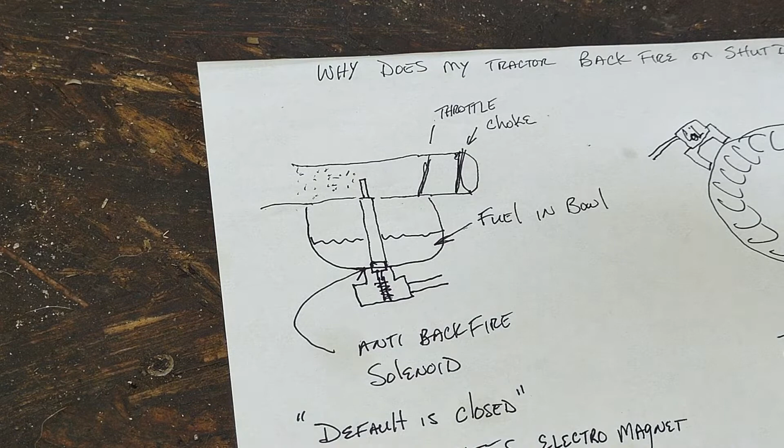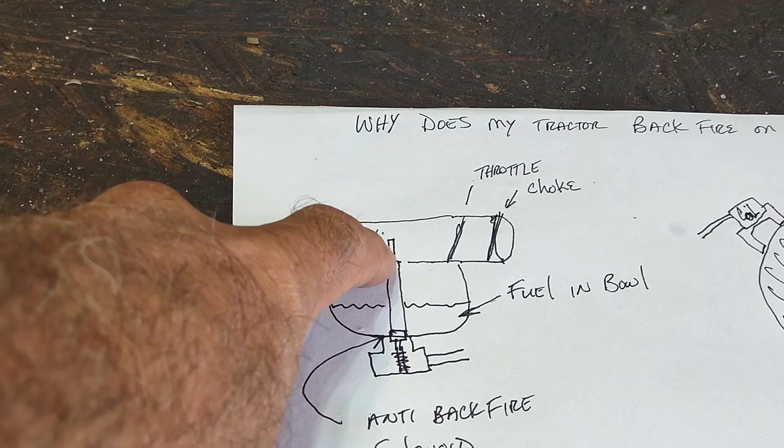So the question is, why does my tractor backfire when I go to shut it down? There's a ton of videos out there that tell you, well, this is what you need to replace - it's called an anti-backfire solenoid. What it does is, its job is to stop or allow the fuel flow from making its way into the engine via the venturi and that emulsion tube.

So what happens is, a lawn tractor is either going to have a big bore single cylinder, or maybe a twin cylinder. And because the workload is not attached directly to the end of the journal, it generally goes down to a pulley, and then it drives a series of pulleys and stuff.

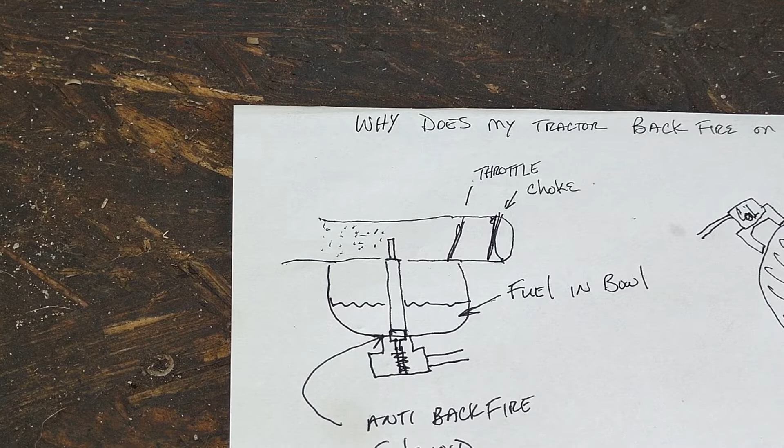A regular push mower has got the blade underneath, and as that's spinning around, that adds weight - that's like having a bigger flywheel. And so on a riding tractor, those flywheels are really super heavy. You'll see where this comes into play.

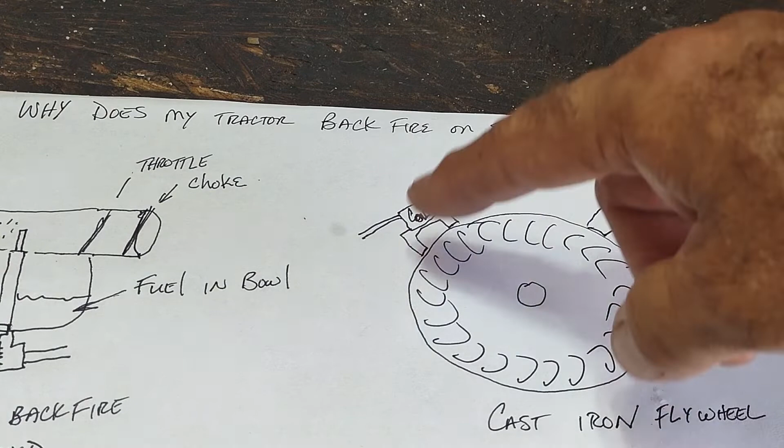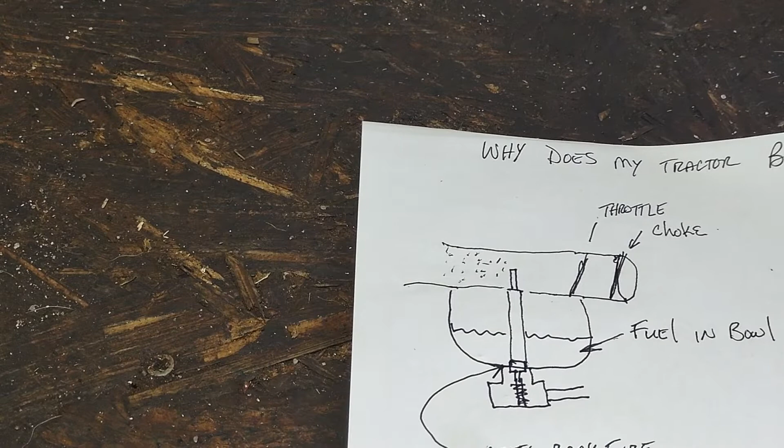So let's just say it's a twin cylinder - ignition coil here, and then this cast iron flywheel that spins around. What happens is, when you go and shut off the ignition switch, it kills the power over to this solenoid that's on the bottom of the bowl of the carburetor.

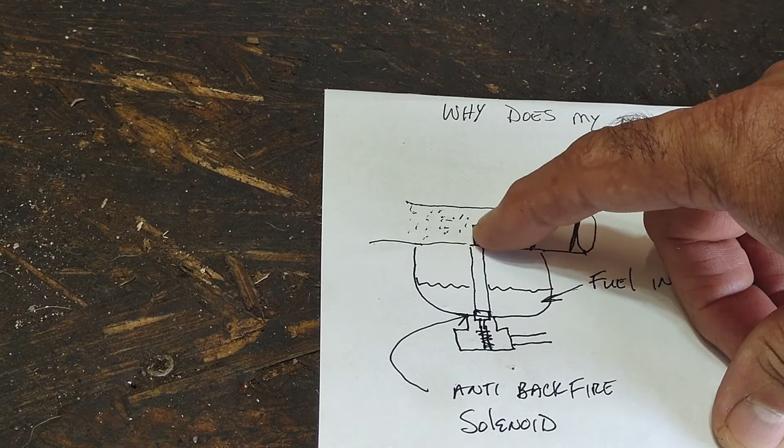And the default is if it has no power, this plunger, which is on a spring, will go up and it will close, so that the fuel cannot go up through the tube in there and then into the engine. Well, I hear a lot of guys say, oh, you don't even really need that.

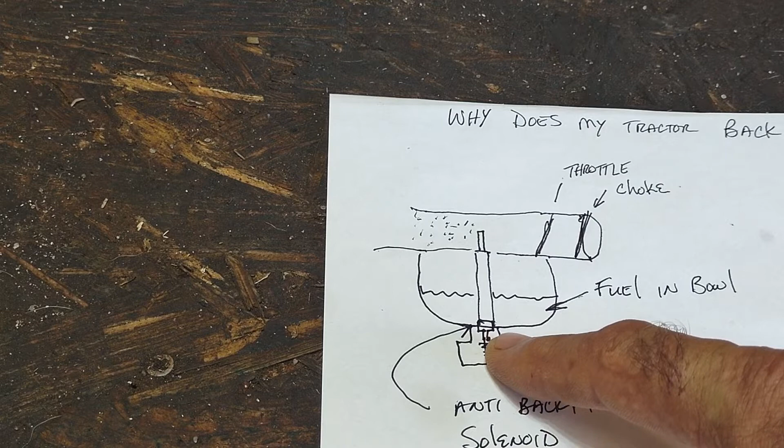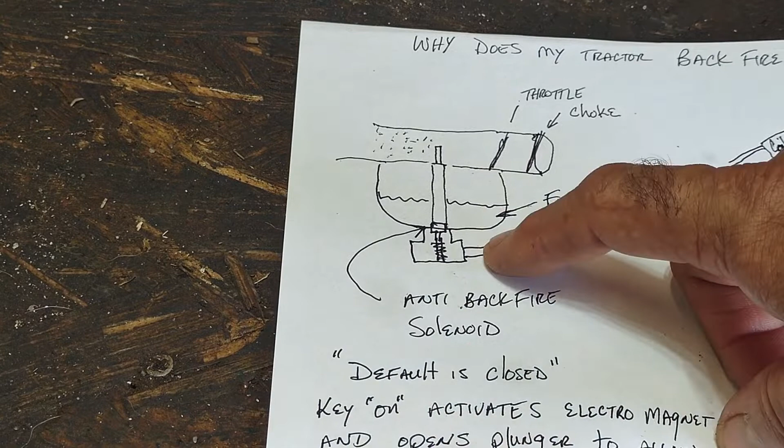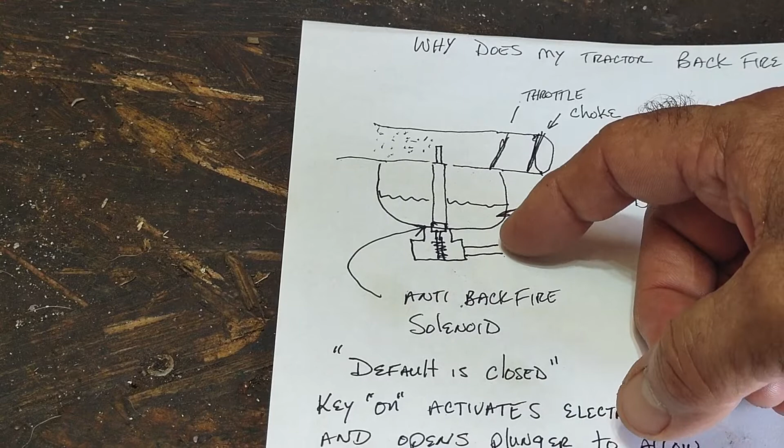Well, you kind of do, because this is what happens. Bear with me. So down here it tells you, because I wrote it, the default on that solenoid, with no power, is closed. The key on activates the electromagnet and opens the plunger to allow the gas in. So if you put a voltage on there and it's not running, you'll hear it click, because it's going to pull that plunger down and allow the gas to go up through.

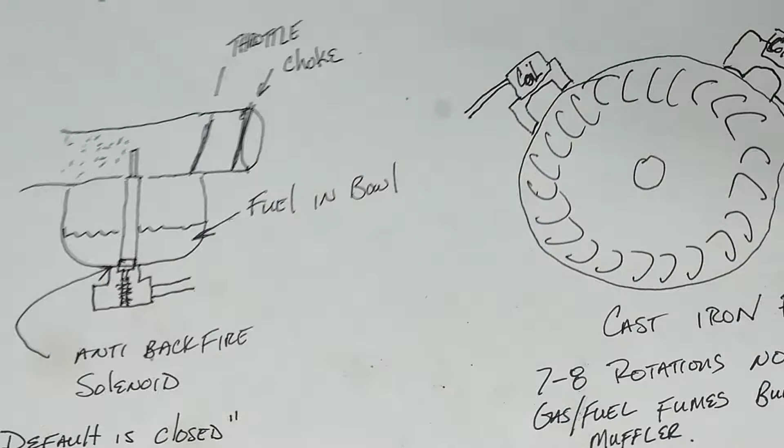And the reason why they put that on there is exactly this, is to stop the backfire. Well, what is a backfire?

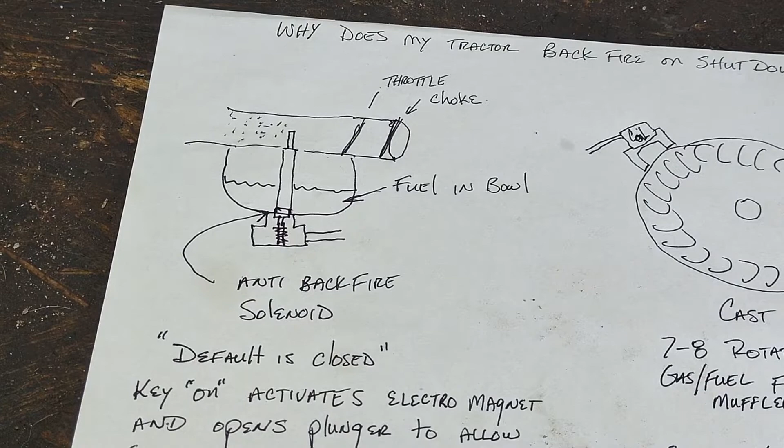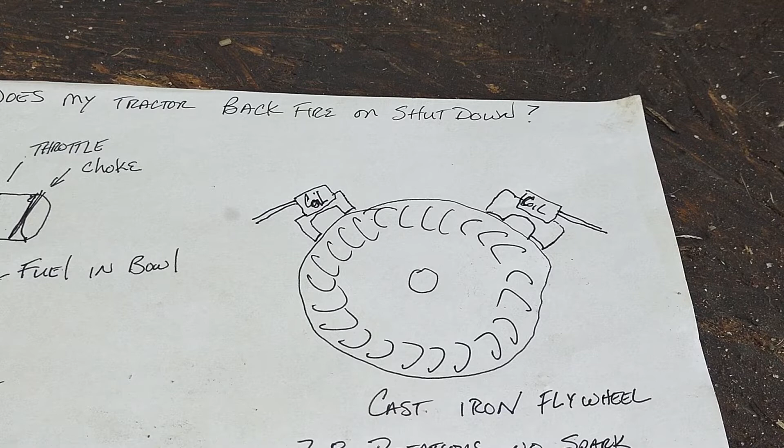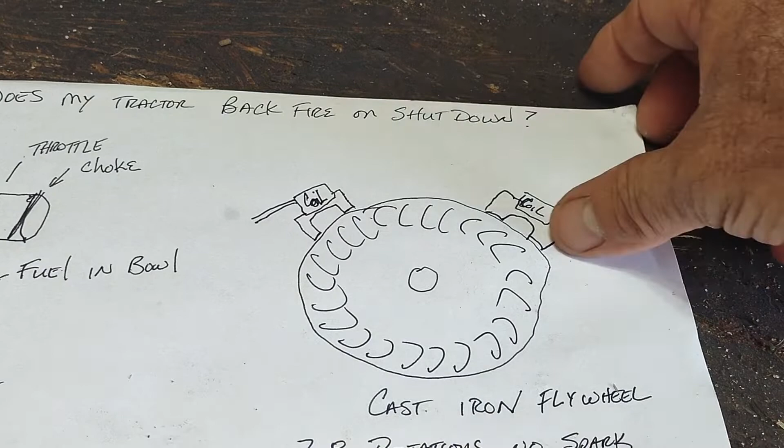Okay, so this big, heavy cast iron flywheel, once you kill the ignition, because it has so much weight, and it's not like a push mower - it doesn't have the brake and all that stuff that leans on the flywheel - it just has too much energy that's spinning around. So after you kill the switch, it's still going to run, probably 7 to 8 rotations with no spark.

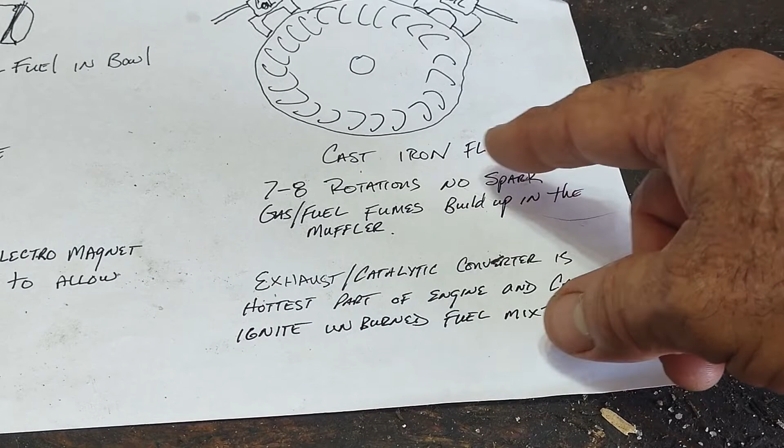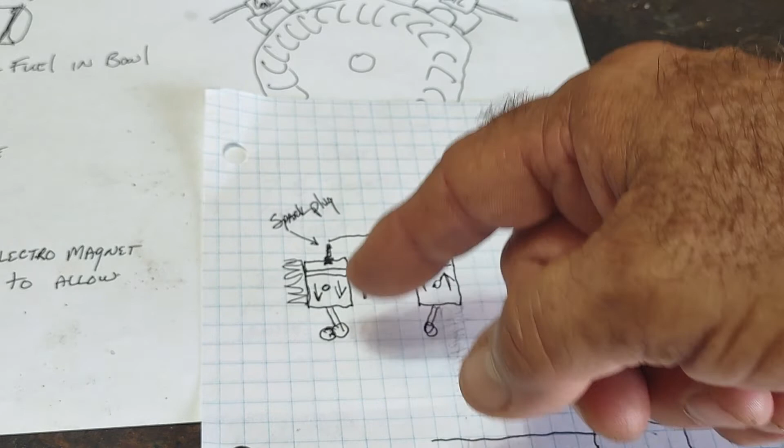The piston is still going up and down. Here, piston number 1 over here is going down - that's drawing gas into the cylinder, but because you have the key turned off, the momentum is still making it run, and it's taking all that unburned fuel and pumping it right out the exhaust. And there's cylinder number 2, same thing - this one's going up, this one's going down. This is pushing out unburned fuel because the ignition is off. The spark plug won't fire.

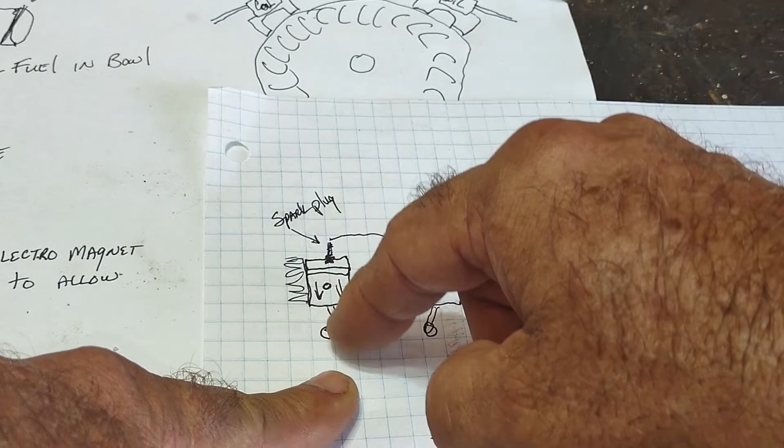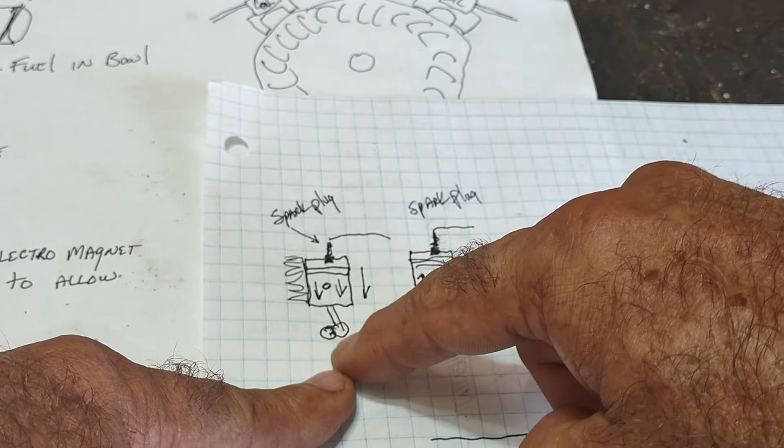So you're going to get the volume of fuel that it takes when it's running, from cylinder number 1 and cylinder number 2, that's going to get dumped into the muffler. If it takes 8 rotations for it to stop, you're going to get 4 cylinderfuls of unburned fuel dumped into the muffler. Same over on this side because it's a twin, so you're going to get 4 volumes of air mixture dumped into the muffler.

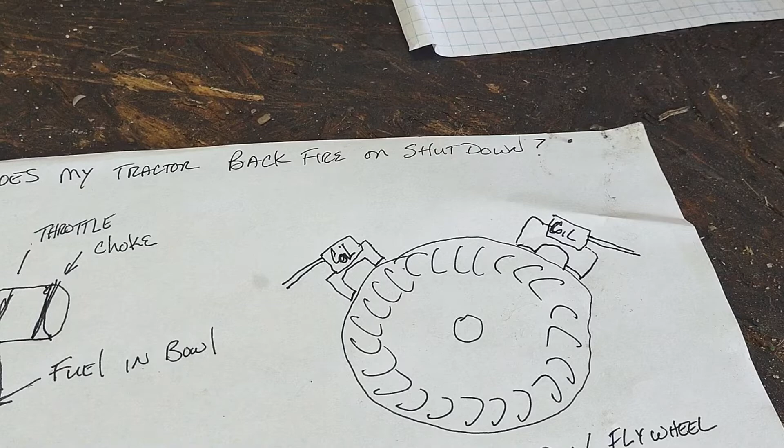The muffler is the hottest part of your engine. Small engines don't have catalytic converters, so what happens is all that unburned fuel gets in there, then it gets ignited by maybe even a glowing piece of carbon still in there if you're running it hard, and then it explodes.

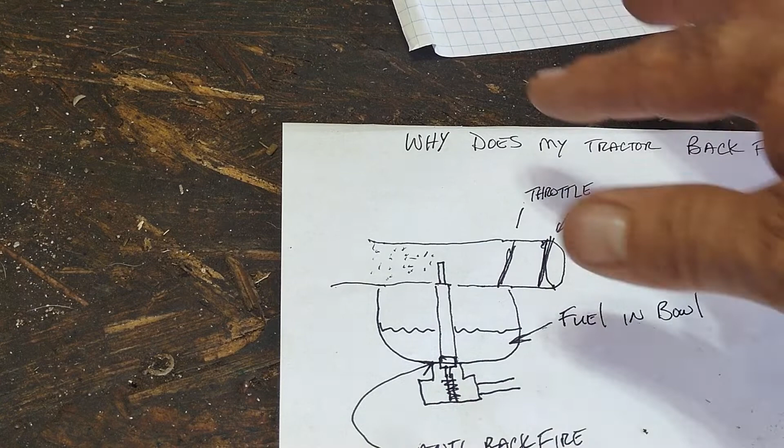That's the backfire. And for the guys that say, oh, you don't even really need to have that solenoid, you can just take a Briggs jet and put it on the bottom, yeah, it'll work. But now each time you shut it down and it backfires, you call it a backfire, but it's really an explosion.

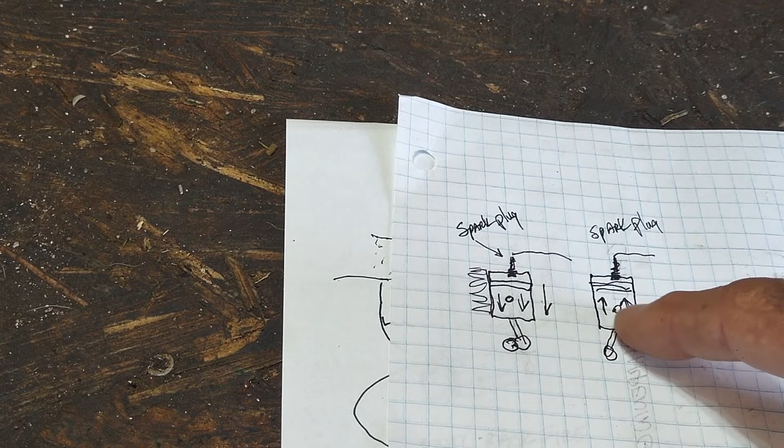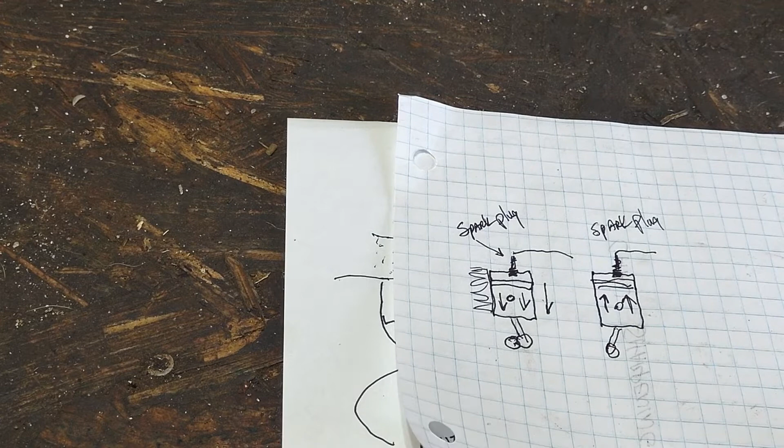And it's only got 3 places to go. It's going to go back up when it explodes, back up through the exhaust tube from the muffler. It's going to try to go back into the engine, which is not good, through either one of those tubes for the exhaust, and it's also going to try to get out where your exhaust normally would go.

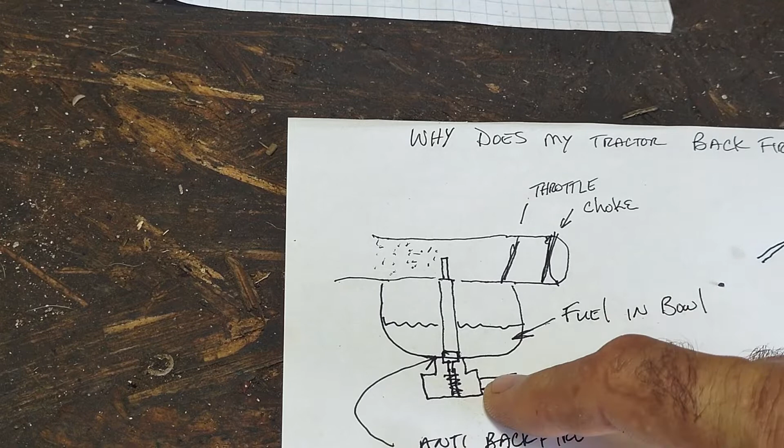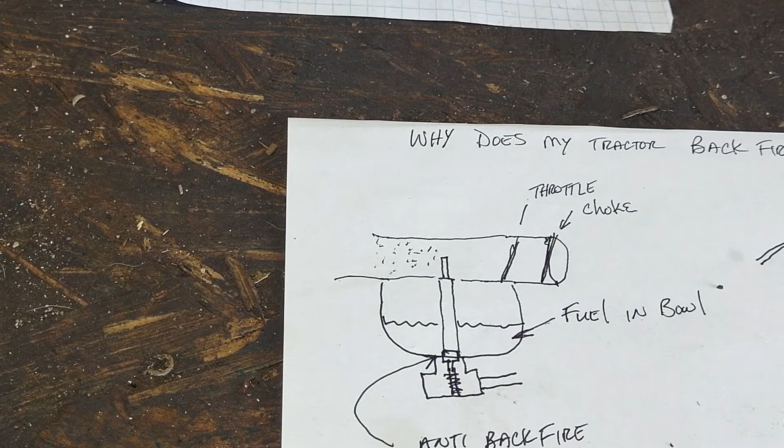So don't listen to those guys that say you don't need that. Yeah, you do need that if you want your engine running the way it's supposed to run and make it last, because for all those times that you're backfiring it, you're not helping it.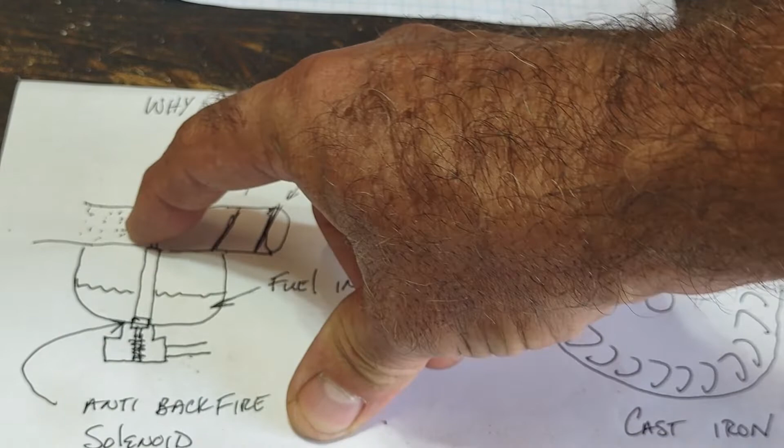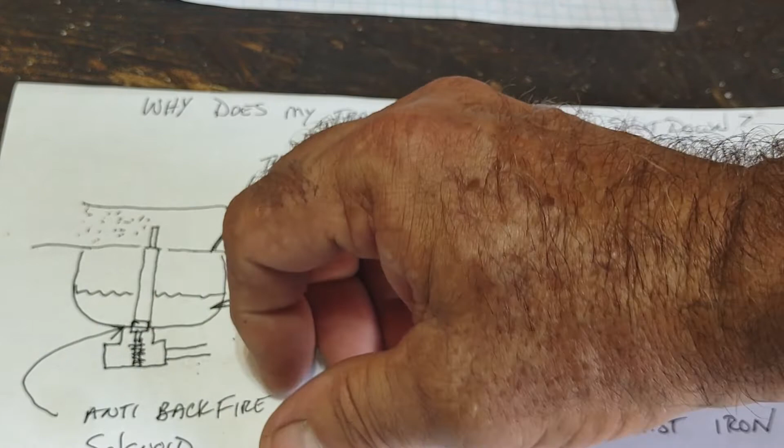So that's why it does it, because of the momentum of this flywheel. And if you don't shut off that gas, sometimes they'll still do it. I've actually seen them still do it, because it's only going to get that much - the fuel that's left inside that little emulsion tube, that's all the fuel it's going to get. If you eliminate that, then it's going to be just like it's running.

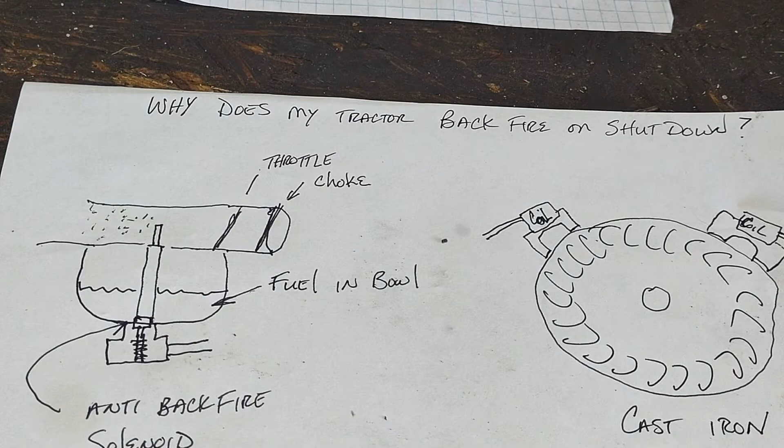You're going to get 4 cycles on cylinder number 1, you're going to get 4 cycles on cylinder number 2 of fuel in there, and then bang, that's what will cause that backfire. So now you want to know, how do I totally eliminate the chance of my machine backfiring?

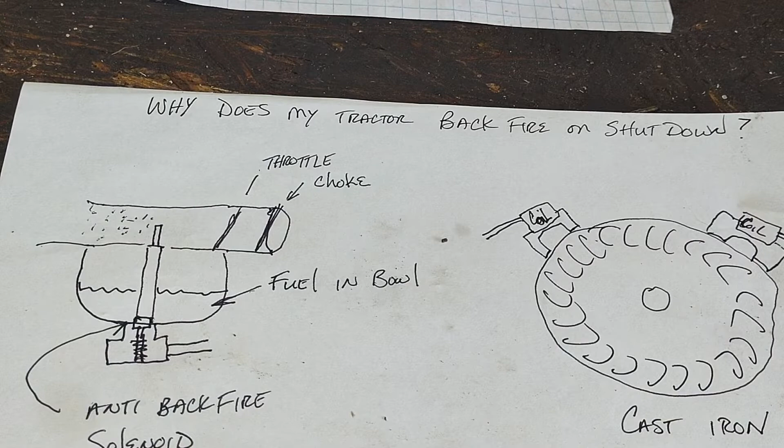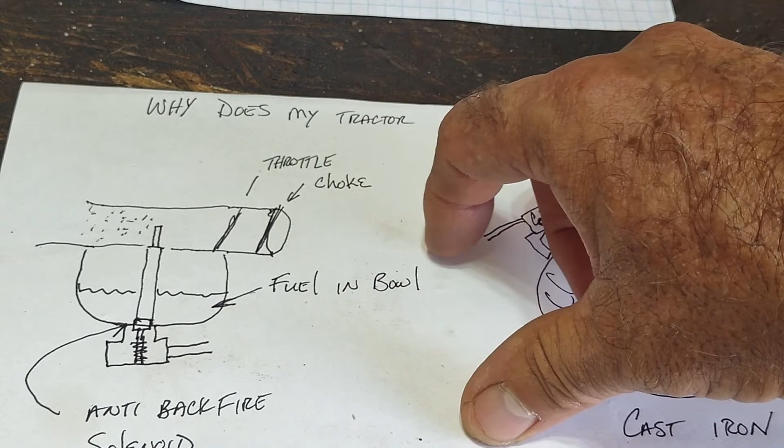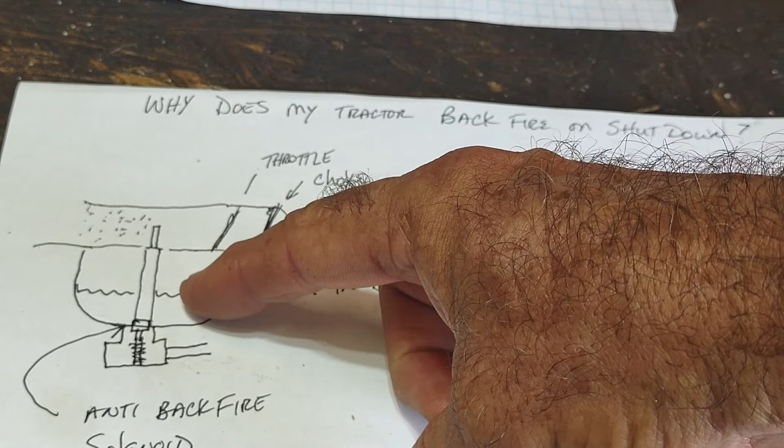Same principle as this: if you were to take and put an inline fuel shutoff someplace over in here, and just turn the fuel off and let the machine run like this, the volume in the bowl, obviously if it's not getting any fuel, it will go down. There'll be nothing left. The machine will die on its own.

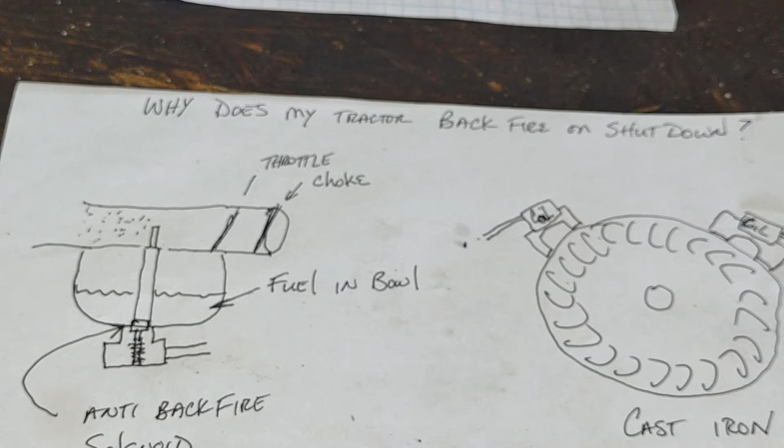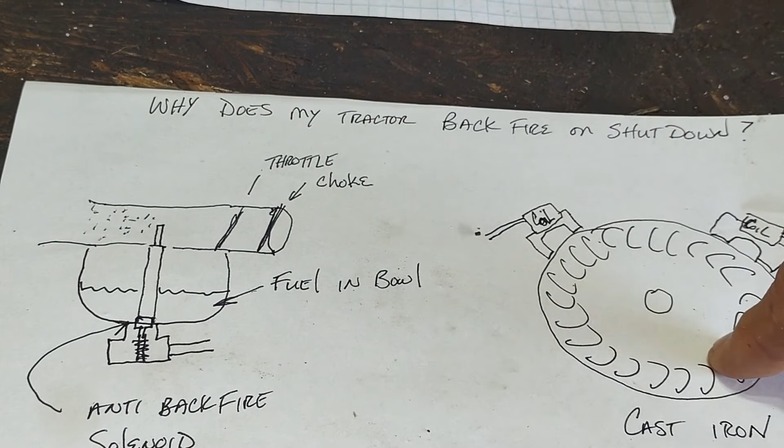There is no fumes to build up in the muffler to get ignited and cause the backfire. So that's what's happening, and that's why your tractor backfires on shutdown - it's getting too much fuel, and it's all because of the weight of the flywheel, because it gets so many rotations. I hope that helps some of you guys.